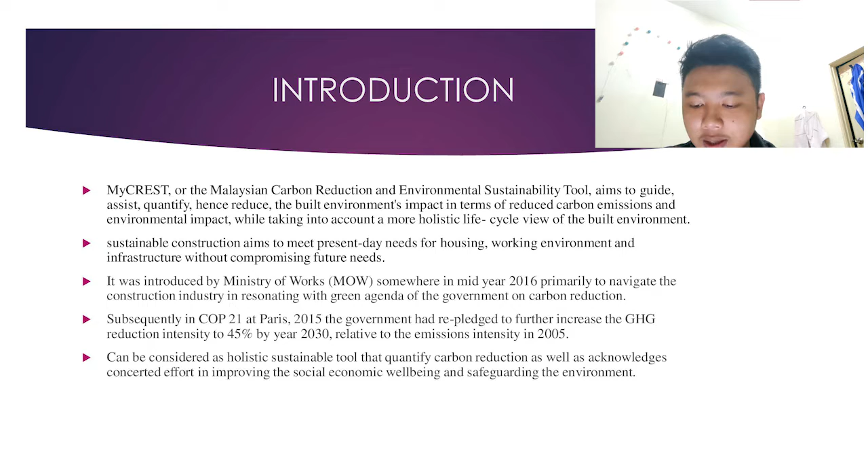Subsequently, in COP21 at Paris 2015, the government had re-pledged to further increase the GHG reduction intensity to 45% by 2030 relative to the emission intensity in 2005. MyCREST can be considered a holistic sustainable tool that quantifies carbon reduction as well as acknowledges concerted effort in improving social economic well-being and safeguarding the environment.

Next is green building in Malaysia. Green building, also known as green construction or sustainable building, refers to both a structure and the application of processes that are environmentally responsible and resource efficient. This requires close cooperation of the contractor, the architects, the engineers, and the client at all stages. The green building practice expands and complements the classical building design concerns of economy, utility, durability, and comfort.

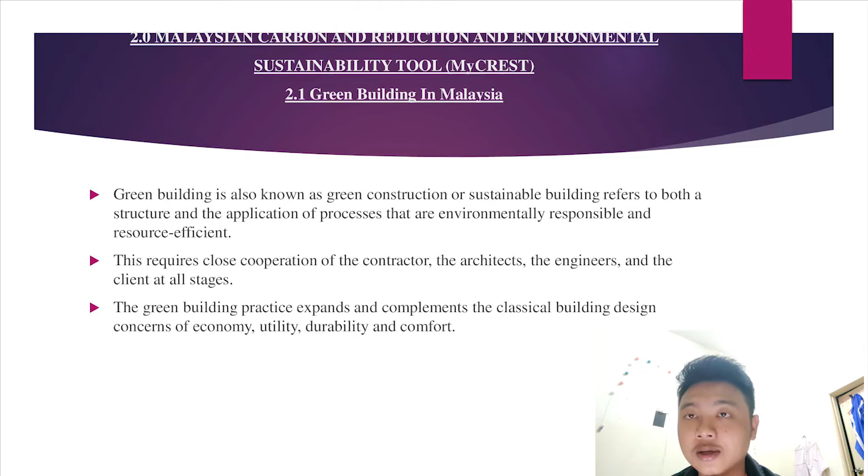Green building is redefining and revolutionizing building practice and emerging as a response to growing concern over pollution and environmental damage, increasing awareness and acceptance of climate change, decreasing natural resources, increasing energy costs, and increasing demand of sustainability in building design and construction. Buildings also create the most waste, use most of the non-energy related resources, and are a source of major pollution.

Residential, commercial, and industrial buildings produce carbon dioxide emissions more than 38% as compared to 10% of world's CO2 emissions.

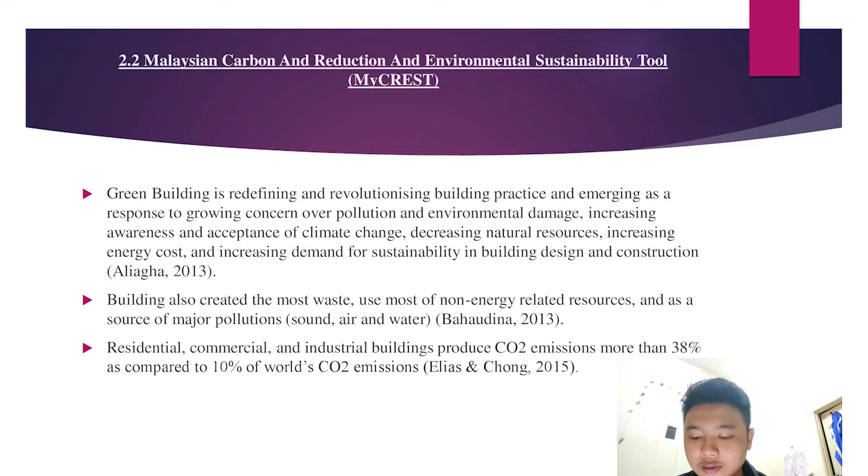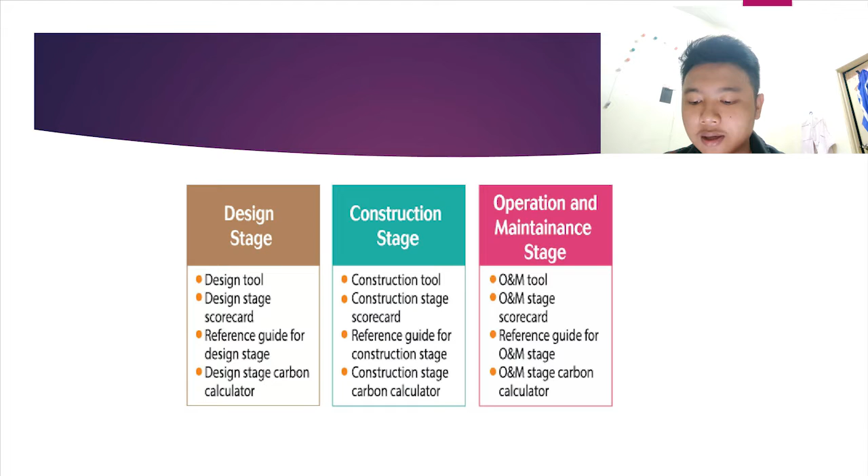The table shows the basic stages for Mycrest assessment and the tools. Each tool produces a rating for each stage of the project life cycle, the first being the design stage. The design stage consists of a design tool, design stage scorecard, reference guide for design stage, and carbon calculator. Second is the construction stage, with its scorecard, reference guide, and carbon calculator. Lastly is the operation and maintenance stage, with its O&M tool, scorecard, reference guide, and O&M stage carbon calculator.

Now, qualification for Mycrest professional training. CIDB introduces Mycrest training which guides the parties involved in the design, construction, operation and maintenance of building to adopt sustainable development practice, and provides a tool to quantify the actual carbon emission at every stage of the building life cycle. In making sure the parties and implementation of Mycrest in construction projects achieve the desired result, CIDB has made an initiative for the parties to attend Mycrest training.

The training aims to expose the general assessment structure of Mycrest, impart the knowledge for correct interpretation of the prerequisite and requirements stipulated in the MyCREST reference guide, provide guidance in preparing the required submittals objectively, assist in completing the scorecard and using the carbon calculator, and share good practice in implementing Mycrest.

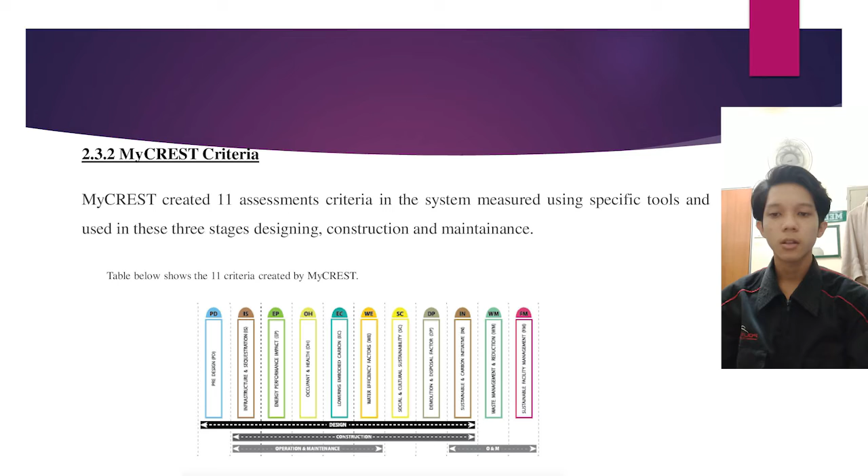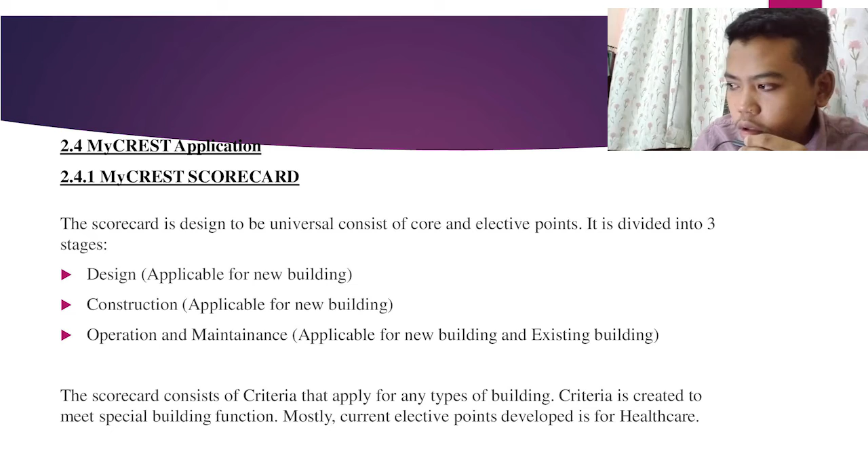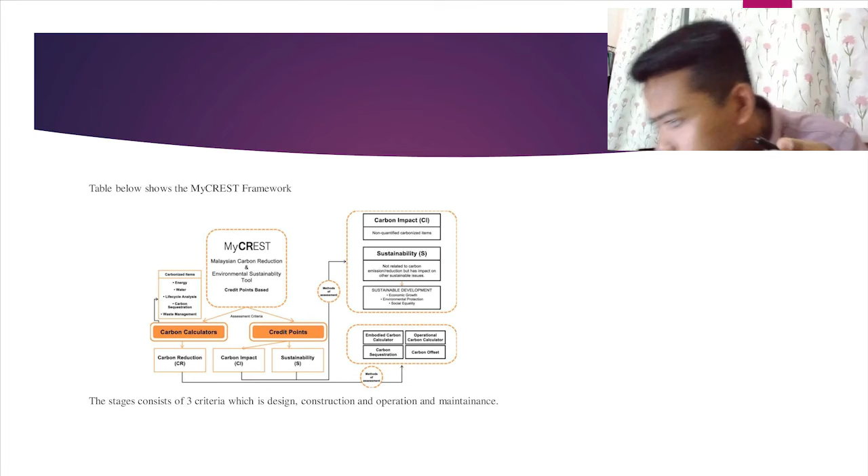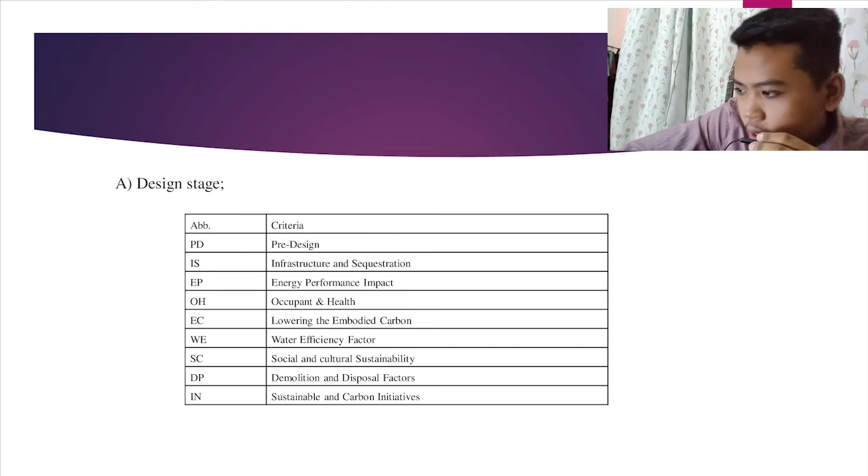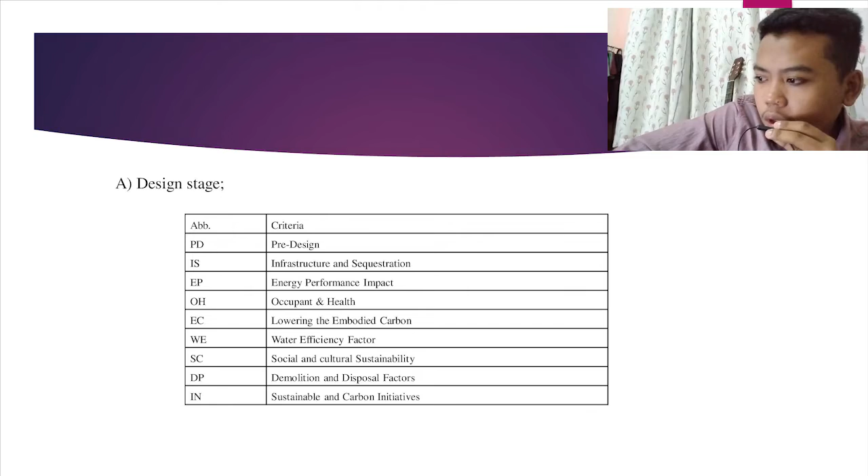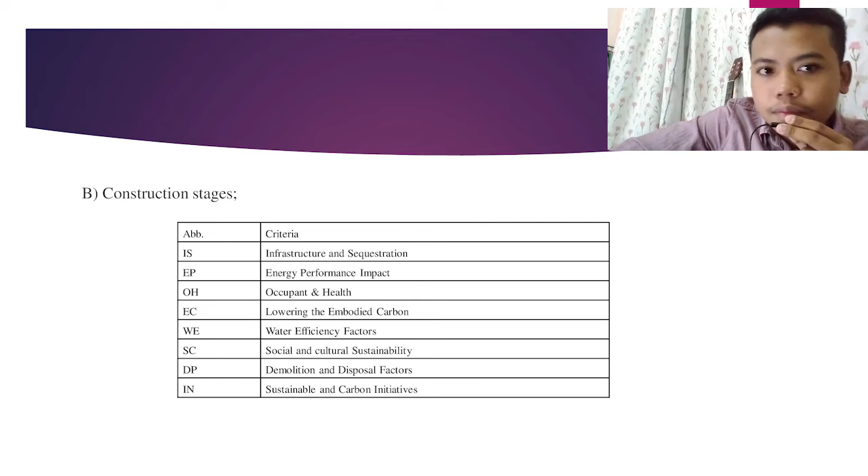B, construction stage, abbreviated criteria: IS for infrastructure and sequestration, EP for energy performance impact, OH for occupant and health, EC for lowering the embodied carbon, WE for water efficiency factor, SC for social and cultural sustainability, DP for demolition and disposal factor, and IN for sustainable and carbon initiative.

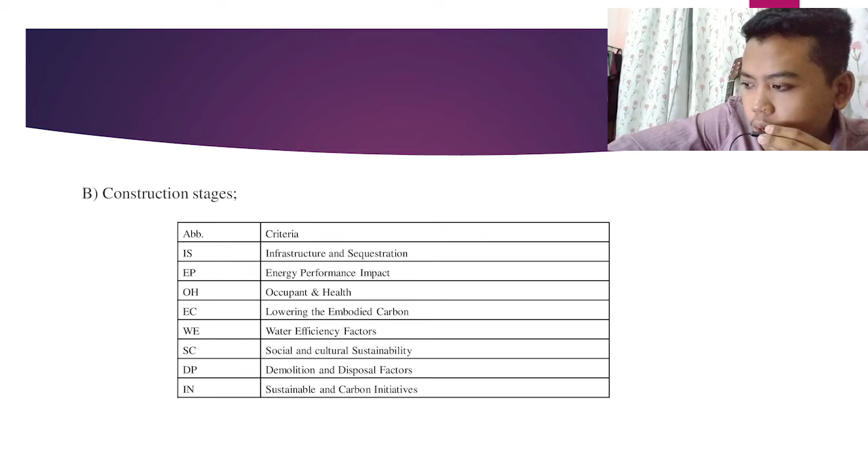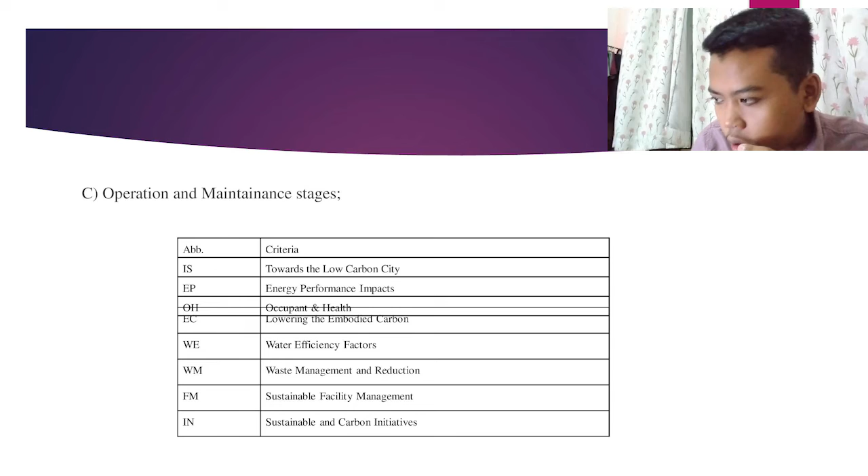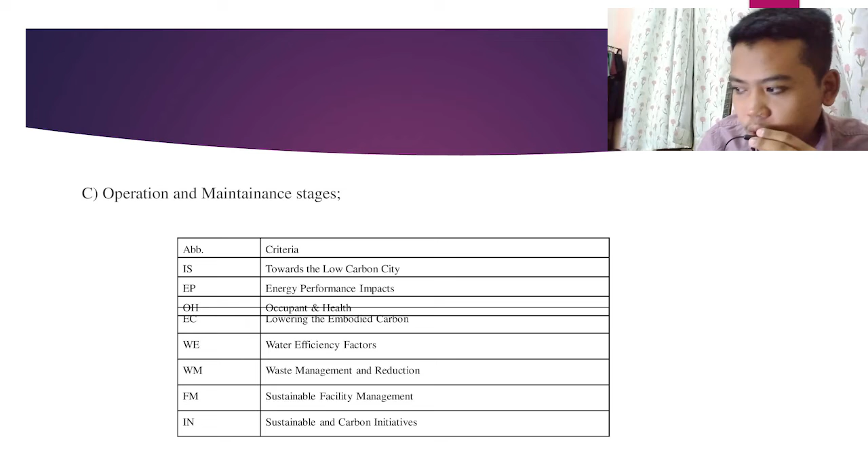C, operation and maintenance stage, abbreviated criteria: IS towards the low carbon city, EP for energy performance impact, OH for occupant and health, EC for lowering the embodied carbon, WE for water efficiency factor, WM for waste management and reduction, FM for sustainable facility management, and IN for sustainable and carbon initiative.

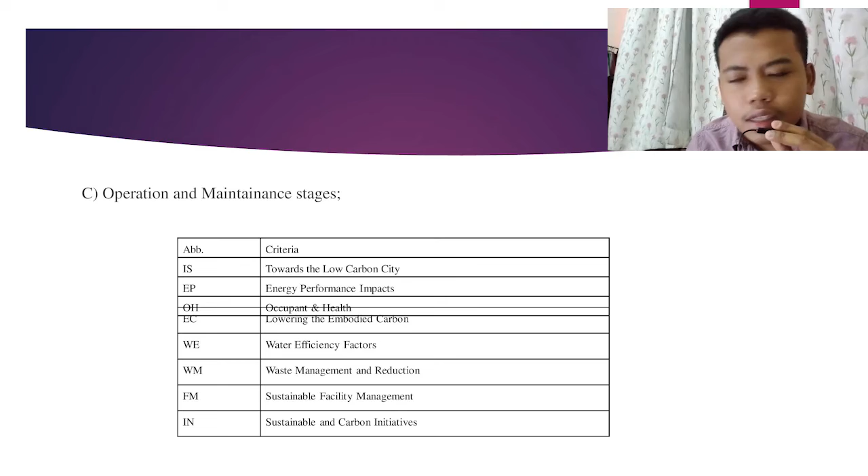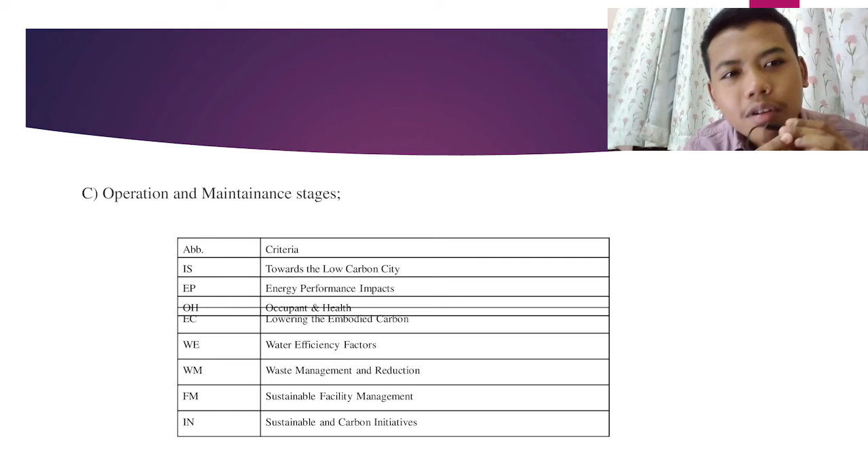Next, there are three types of logo used to verify each criteria in the Mycrest scorecard: first, carbon reduction; second, carbon impact; and third, sustainable. That's all from me, thank you.

2.4.2, Reference Guidelines. The reference guide contains detailed guidelines on the requirement and strategies that can be adopted to score the sub criteria in the scorecard. So that's the reference guidelines.

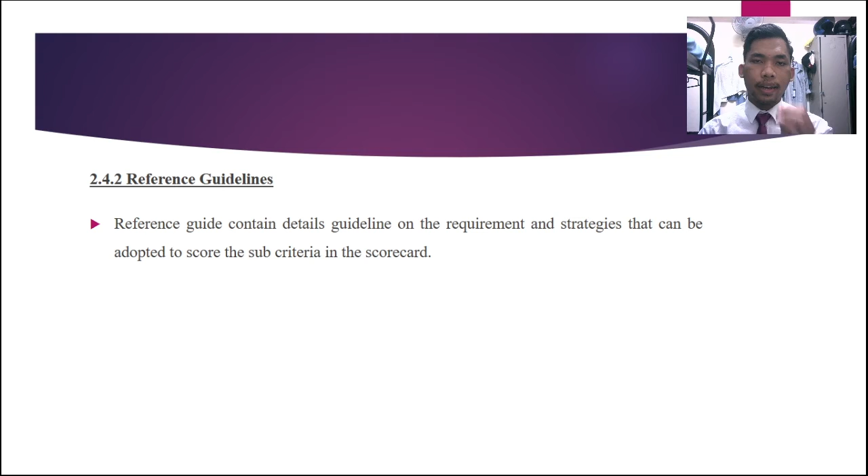And then I go to the conclusion. In conclusion, Mycrest is a reliable green rating tool that guides carbon emission in buildings, aiming to reduce the carbon footprint in any construction project. It is also important for society to know that Malaysia has a green rating tool to assess our buildings, and it shows the government's activities in supporting the sustainability movement by the United Nations.

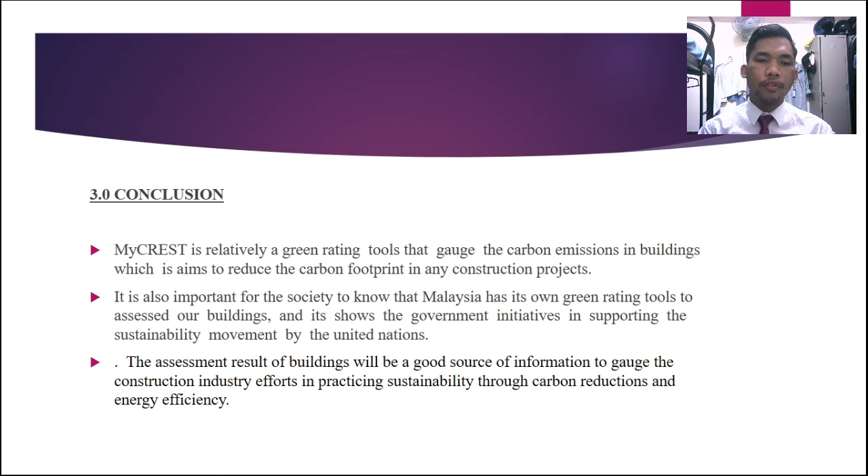The assessment result of the building will be a good source of information, to gauge the construction industry's effort in practicing sustainability through carbon reduction, and energy efficiency.

The source of information can be a good baseline for our construction industry to move forward, improving the practice to be more sustainable. Generally, from the research, obviously the majority of the respondents having completed this training acquired new knowledge on MyCREST. It can be concluded that this training has achieved the objective set out by CIDB.

So at least it suggests further research can be done, adding the assessment of the trainees and observation during the training, which can help to improve and return the data. Furthermore, a study can be made on the application of MyCREST by the trainees in order for them to understand and implement MyCREST in their project.